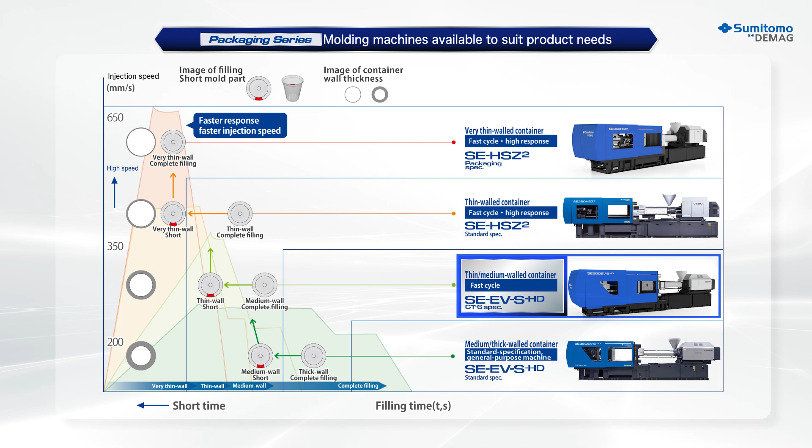CT6 Spec, a model for mid to thin wall packaging products with excellent cost performance. This new series ranges from 220 to 500 tons and is available in 8 models. This new debut series inherits the ideas of high cycle molding and also incorporates the benefits of the standard machine.

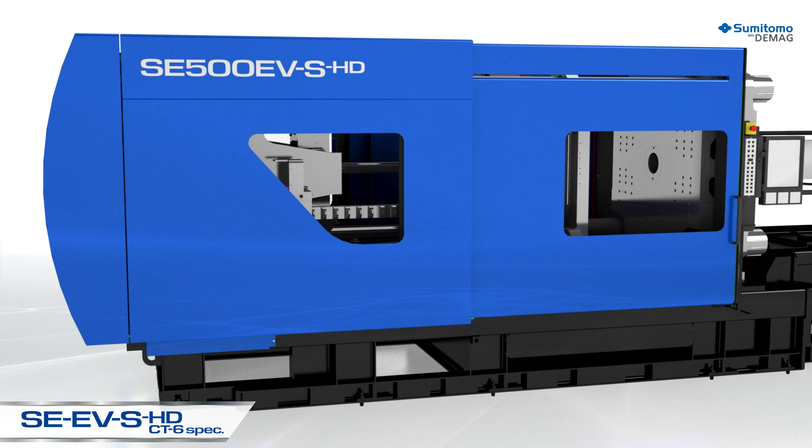The CT6 Spec has a mold clamping device that inherits essential features such as DCPP and linear guide, which are required for high cycle molding. It also features a higher mold mounting capacity with its wide and square tie bar spacing design. One of the advantages of this machine is downsizing.

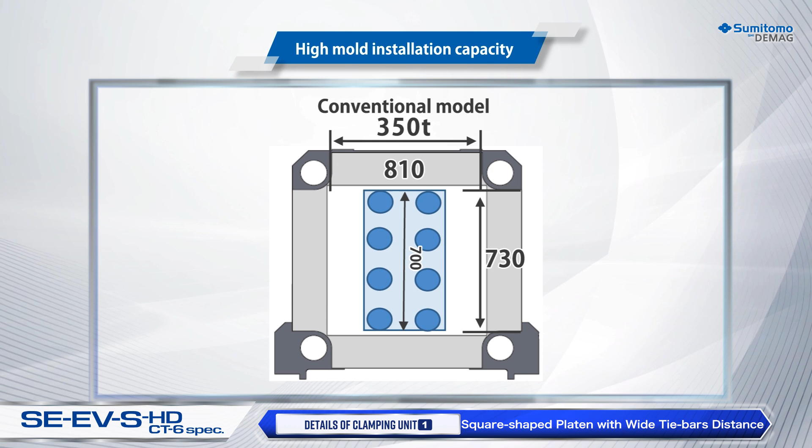For example, a mold that has been previously mounted on a 350-ton machine can be mounted onto a 280-ton model of the CT6 Spec.

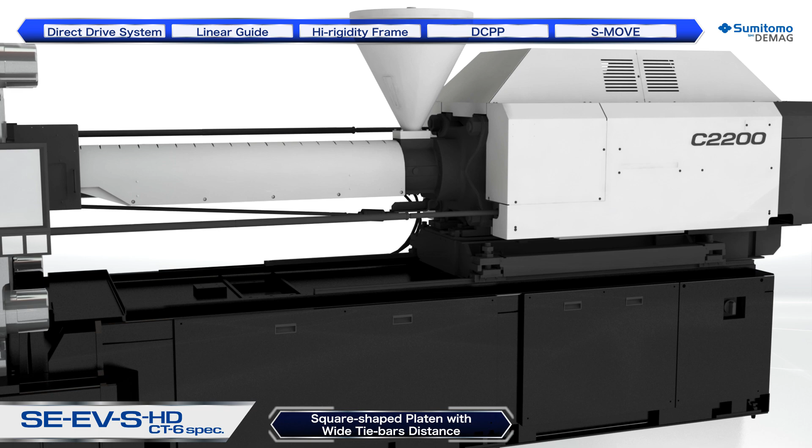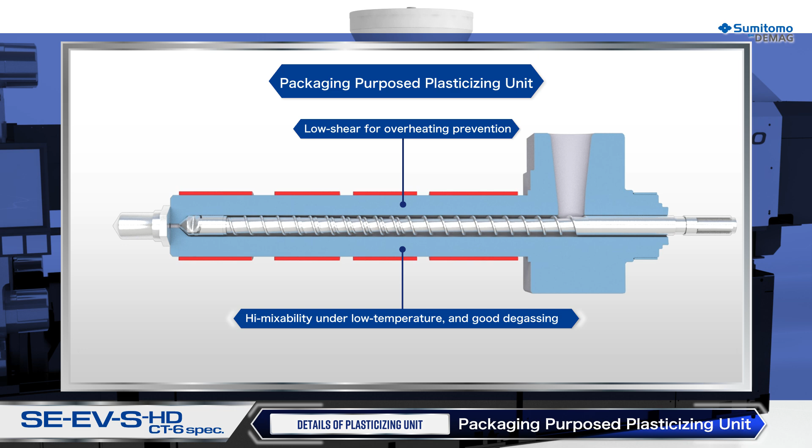The plasticizing unit of the CT6 Spec has achieved a higher plasticization performance with emphasis on cost performance through the combination of a dosing motor equivalent to that of a standard machine and a screw assembly for packaging products.

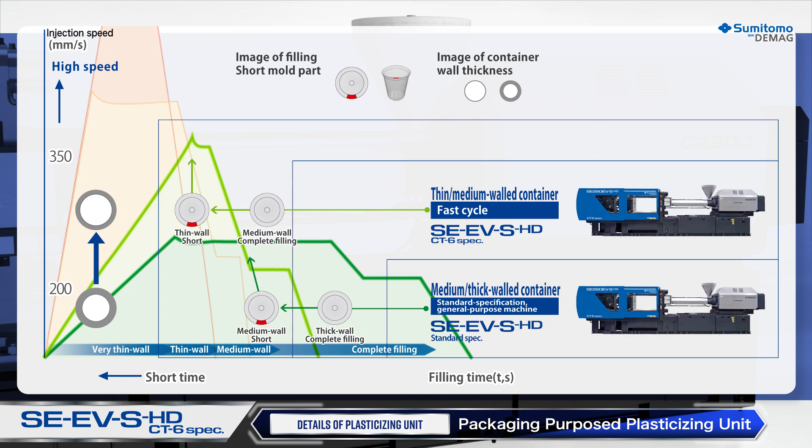In addition, its maximum injection velocity has been raised to approximately 2 times higher than that of a standard model, allowing it to support mid to thin wall packaging products.

Furthermore, it is equipped with a sensing function that is useful for monitoring temperature of key components of the machine and also predicting their replacement time. It contributes to improved machine reliability and also reduces machine downtime.

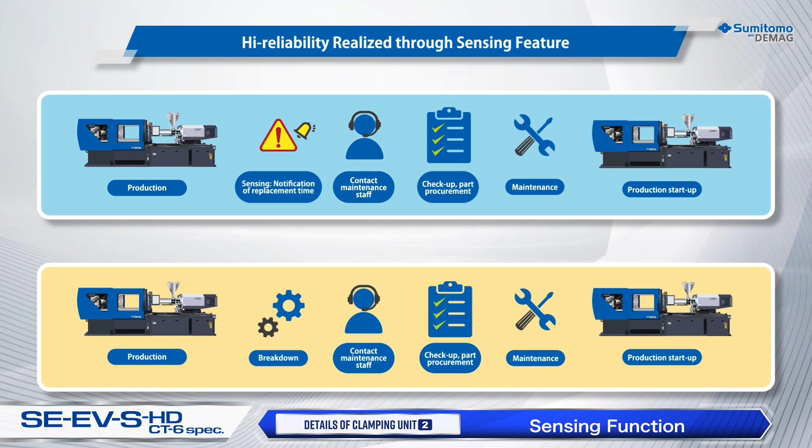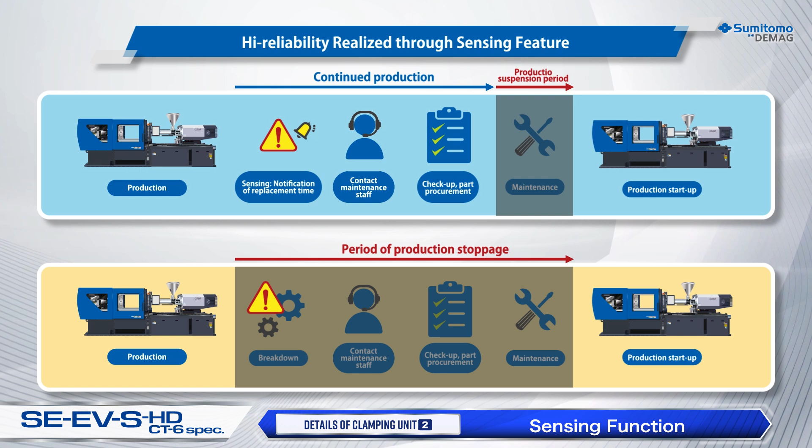As for conventional machines, when a machine failed, production suspension could be prolonged due to an unplanned order of parts, which may need longer delivery time. This sensing function enables prediction of component failure during production, and so by arrangement of replacement components in advance, it could help reduce lead time.

As described above, CT6 Spec contributes to improved productivity of mid to thin wall packaging products molding with dedicated packaging features and maintains its superiority in cost performance.

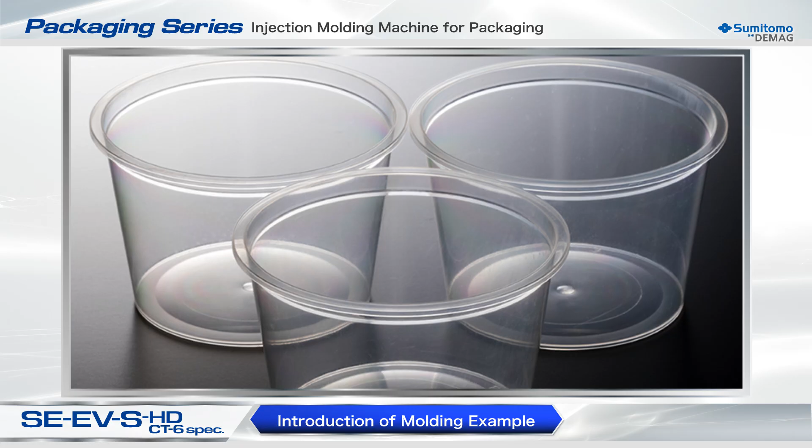An 8-cavity dessert cup with L/T 220 can be achieved at a 6.0 second molding cycle by the SE220 EV-S CT-6 Spec.